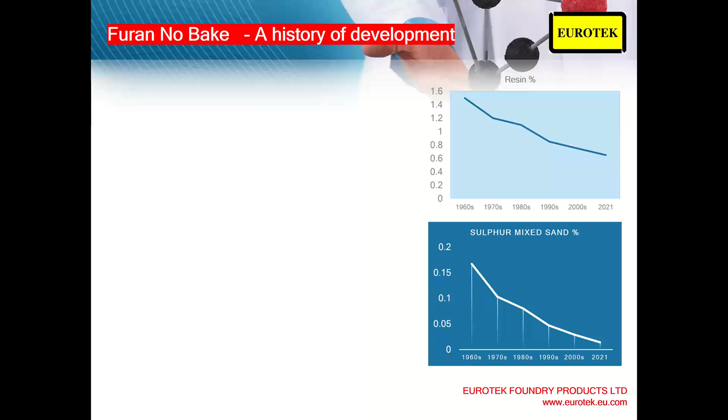Okay, and the presentation is on moulding materials, essentially furan no-bake, the continuing story. And I want to touch initially on the history of the development of furan no-bake. It was introduced in 1960 with the formation of urea formaldehyde and furfuryl alcohol resins. They offered a unique ability to generate high mechanical strength, which was a significant advantage over, at that time, inorganic systems such as sodium silicate.

And their organic nature meant they could be mechanically reclaimed for the first time. They also gave improved casting finish, particularly in terms of definition, over traditional green sand. And this led to their rapid worldwide acceptance and use. However, the addition rates in those days were typically 1.5% binder, and the catalysts in the region of 50–60%, based on things like sulfuric acid.

The 1970s and the 1980s saw the furan no-bake system become the largest selling group of foundry binders worldwide. And it also saw the introduction, for the first time, of phenol formaldehyde furfuryl alcohol binders and the corresponding copolymers, which meant they could basically be launched into steel foundries. At this point, addition rates were falling, and typically binder levels were in the region of 1.2%.

But during the 1970s, we saw the introduction of urethane no-bake, pioneered by Ashland Chemicals, often now referred to by their trademark, PEP-SET. It began to enter the market and was particularly excellent in terms of core-making abilities and also for non-ferrous applications. And also its sister gas-cured process, cold box.

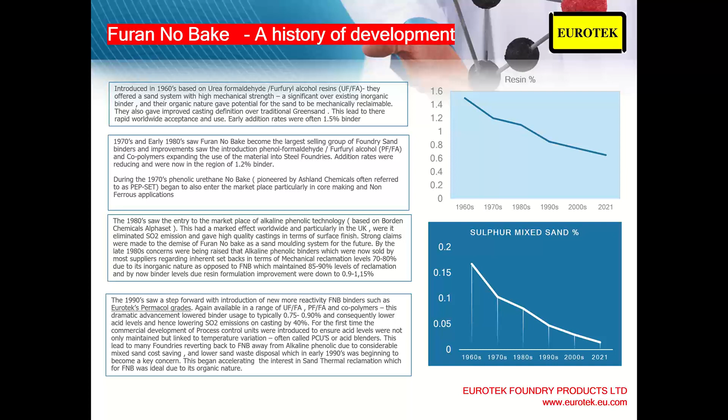The 2000s saw continued development, and again it was the reactivity of the binders that moved us forward, with the Envirocol range and other companies manufacturing much more reactive binders. This has meant furan can now run between 0.6 and 0.75 for very well maintained sand systems, offering low mixed sand cost, improved sand reclamation, and reducing SO2 by a further 30%. This shows the trend of the graphs opposite.

This has also led to further advancements in process control, strongly introducing more accurate blending and remote access support to ensure chemical usage is minimised, which will be seen later in the IBS system marketed by Foundry Machinery and Spares.

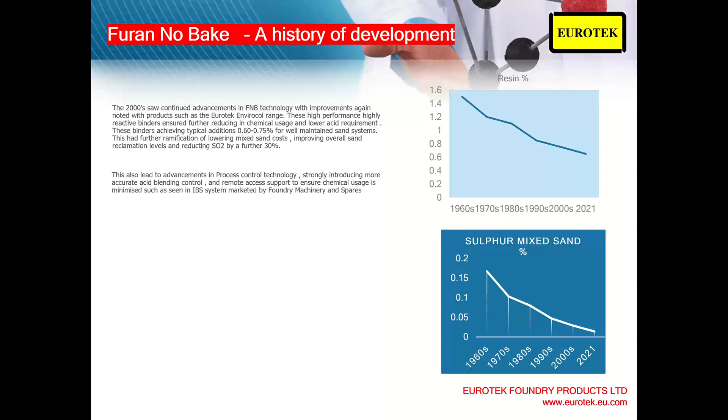An example I personally give: most Saturday mornings I get a phone call from one of our biggest furan users in India, where he makes very large boxed and boxless molds at around 50 degrees and requires fine tuning on his blending. We do this remote control very easily, rapidly, and successfully. He maintains addition rates of 0.7% binder on poor local quality sand and maintains the ability to produce large molds at over 50 degrees centigrade, something we would not have been able to do back in the 1970s, early 80s.

Recent developments have seen the introduction of even higher performance polymer versions of furan no-bake. Why have we brought those in? Two reasons: one is to reduce the demand and use of furfuryl alcohol in the binder, simply to drive costs down. I think there's probably nobody in the industry who doesn't know the impact at the moment of FA on furan binders worldwide, with COVID and the Chinese export situation, furan prices are probably at the highest price they've been for 25 years. So it's something we need to work on, and it's now been introduced into the market.

This has also been driven by new REACH environmental considerations, where free formaldehyde levels have to be less than 0.1% of the binder, and this we are now achieving on a readily acceptable basis. Going back to furans in the 90s and early 2000s, they wouldn't have achieved this - they'd have been more than 0.5% free phenol or free formaldehyde, and therefore would have been outlawed under the new regulations.

Furthermore, as I said, the ability to mix and control sand up to 50 degrees gives us a unique ability, and this is now being underpinned with the development of new lower sulfur catalysts, which for the first time are giving us the ability to achieve those goals while maintaining performance and strength. In the old days, the classic way was always to basically water the catalyst out, which is no good for big molds at high temperatures because of the through-cure characteristics.

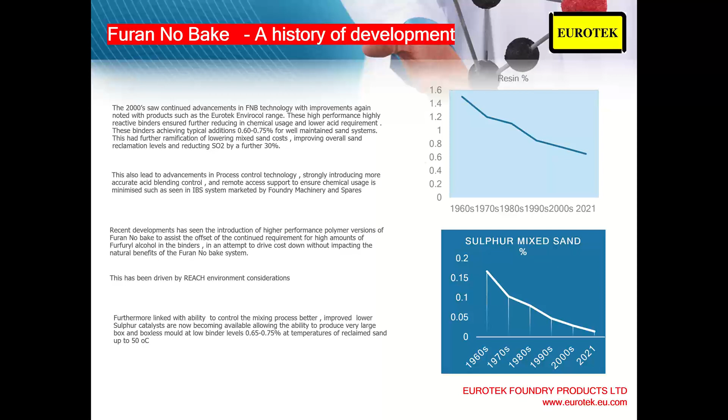So I'll just quickly discuss the three groups of chemicals: the traditional furan, which we call Permaset, the more reactive series, Permacol, and the new very reactive series, Envirocol. You can see here, for example, Permaset is a traditional furan binder, used for large box moulding - it gives good breakdown, but it's a traditional furan system.

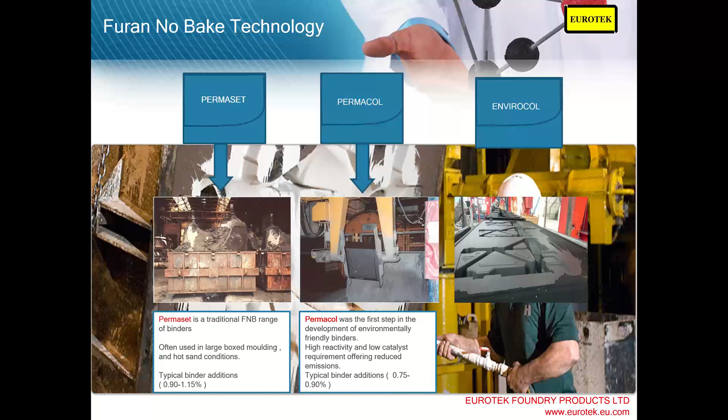Permacol was the first step in the development of environmentally friendly binders. It has high reactivity, low catalyst requirement, and low binder usage. Here's an example where you can see from a fast loop a mould being picked up after 6-7 minutes and moved to the coating station because of the high mechanical strength and rapid set. I think Alex Simmons will be quite happy, let me tell you, that's where it is.

Okay, and then we look at the Envirocol - they spearhead the latest environmentally friendly technology. It offers low emissions in terms of SO2, free formaldehyde, free phenol, and also biological and chemical oxygen demands.

A classic case at the moment of reclamation is, for example, an alkaline phenolic. If we analyse an alkaline phenolic, it has 3.5 to 5.5 milligrams per kilogram of elutable phenol; new furan is less than 0.02. The other concern in the industry at the moment is concentrated elutable carbon - alkaline phenolics are in the region of 400 to 500 milligrams per litre, while furan is calculated at less than 2. So these are dramatically more environmentally friendly products than we think, particularly its ability to go to waste.

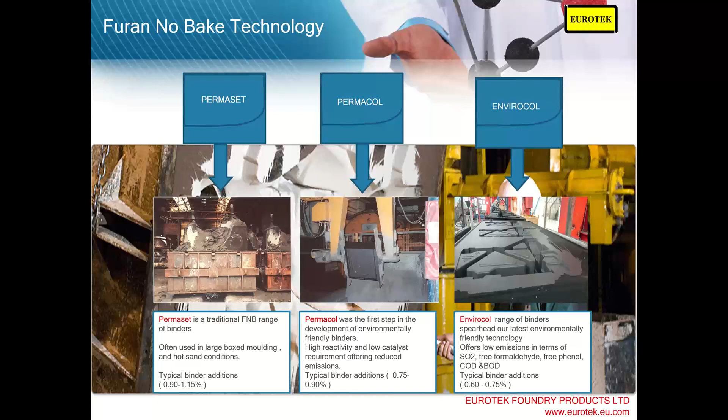So let's look at some of the benefits. We have high core and mold strengths. This means we can typically turn the binder down dramatically from where it was at its early concept.

We have excellent reclamation properties. We can reclaim 85 to 95% with mechanical alone. And the example I always say to foundries: if you do everything right with a furan mould, you'll get a good mould. If you make anything bad with a furan mould, you'll still probably get a good mould. Other processes such as alkaline phenolic, you won't get that. You have to do everything absolutely right to maintain the quality.

It's an abusable system. It's high reactivity. It gives you fast set times. It's ideal for boxless moulding, fast loop systems.

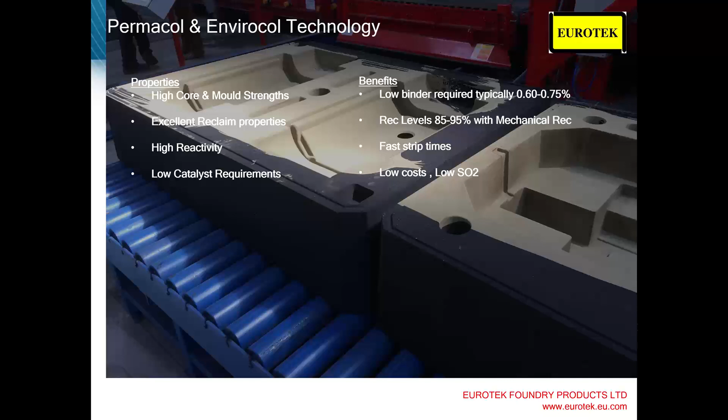It has now lower acid concentrations and requirements. This lowers cost. It lowers sulfur dioxide. It has low viscosity now compared to what it used to do, which means you get much better compaction and higher surface finish than you did with traditional furan binders 30 years ago.

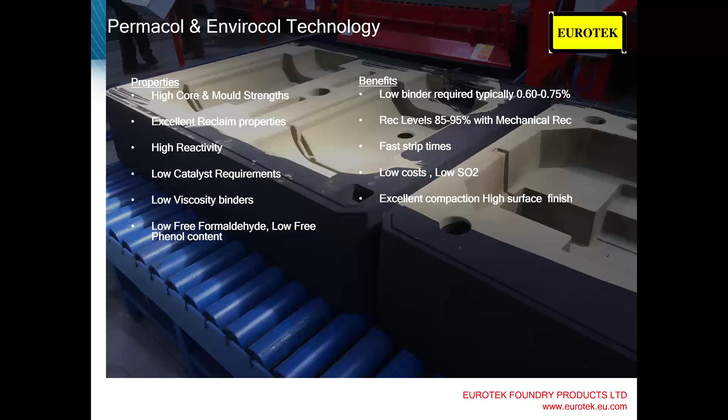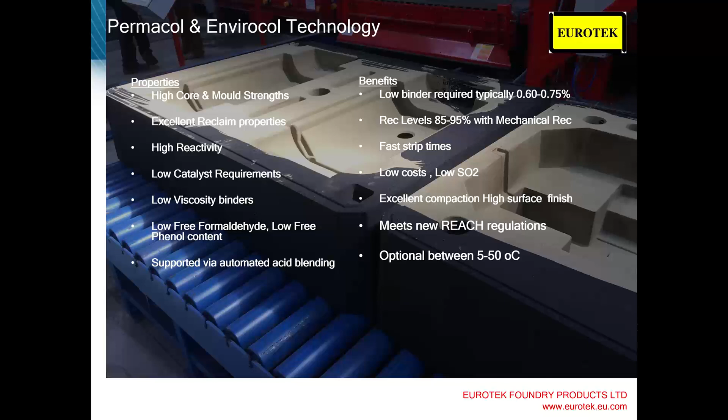We offer low free formaldehyde, as we discussed, low free phenol content. And that meets the new REACH regulations, fundamentally very important. We're supported by automated acid blending. And it's operational between 5 to 50 degrees centigrade, which is a major change we've seen over the last 30 years.

We have a technology now called AiroPure, which we'll go on to shortly. And that is a mist that we can spray during the casting to eliminate sulfur dioxide. It's not an odour, it's not a perfume, it's actually a reagent which is non-carcinogenic. We developed with Durham University a material that converts SO2 to SO4 and removes the problem.

Okay, there's a cost, of course there's a cost. You're spraying an ingredient during casting into the atmosphere, which therefore has to meet all environmental requirements. It's non-carcinogenic, it's non-hazardous, it's non-flammable. It's essentially a benign product.

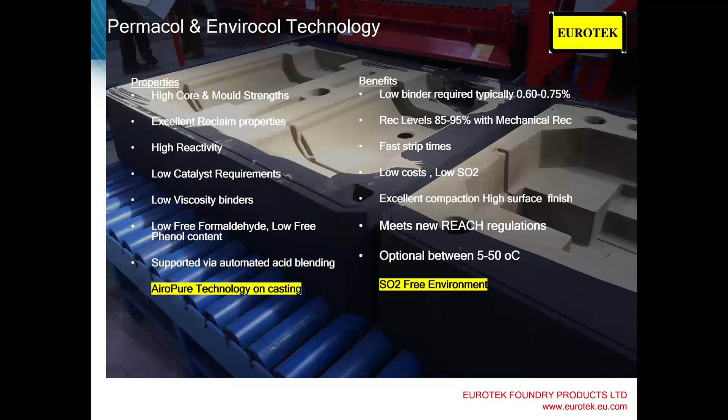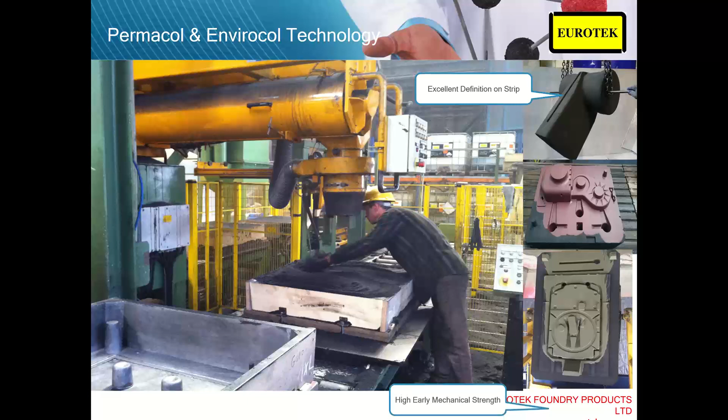So here we can see some typical examples of furan in action. We look at some of the excellent definition we get on these cores. We're looking at high mechanical strength. These are moulds being picked up off fast loop in about 6 minutes for coating.

We have low fume now at the mixing station, albeit on an omega machine where there is an extraction point on it, I'll admit. But the level of free formaldehyde, free phenol and free FA on this system is dramatically lower than what we used to see 20, 30 years ago.

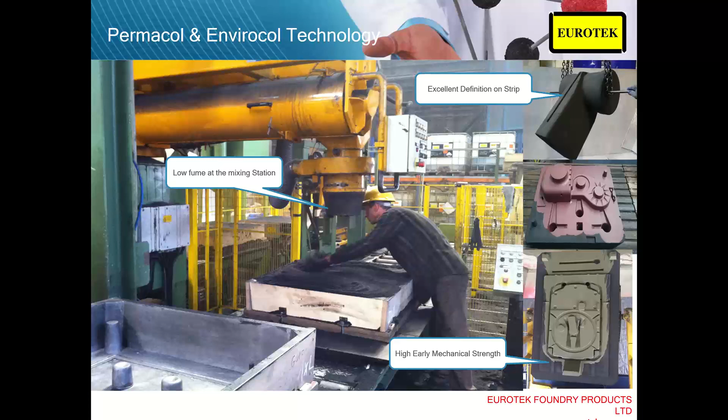We see high levels on this particular foundry of mechanical reclamation. They reclaim at 90 to 95%, although they do use a secondary attrition unit for the last 3 to 4% rather than the thermal. We see the improved mould definition because of the low viscosity.

We see the ability, because they're generating mechanical strength, to be able to apply coatings quickly after the moulding process starts. We don't see the same degree of softening back of coatings that we used to see traditionally 20 years ago.

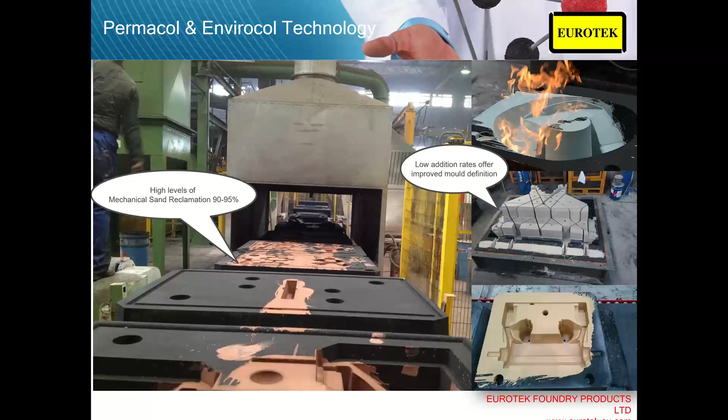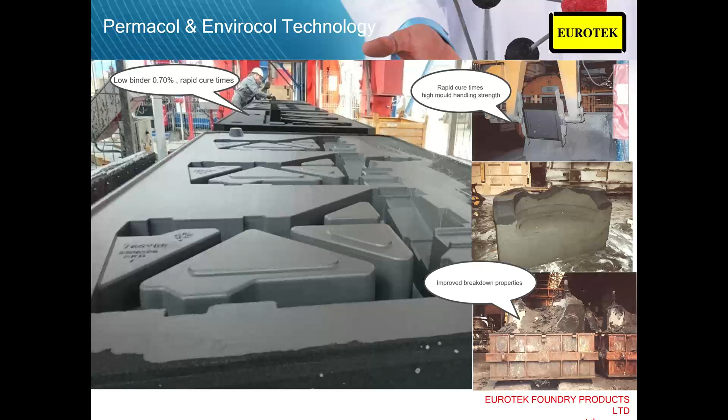So what we're trying to put together is a development package where we put the improved binders, which have low fume, with the control panels, the better control, the ability to remove sulfur dioxide, to meet REACH regulations, to have the ability to reduce costs because it's no longer having to be mass volumes like most processes going through the reclamation system.

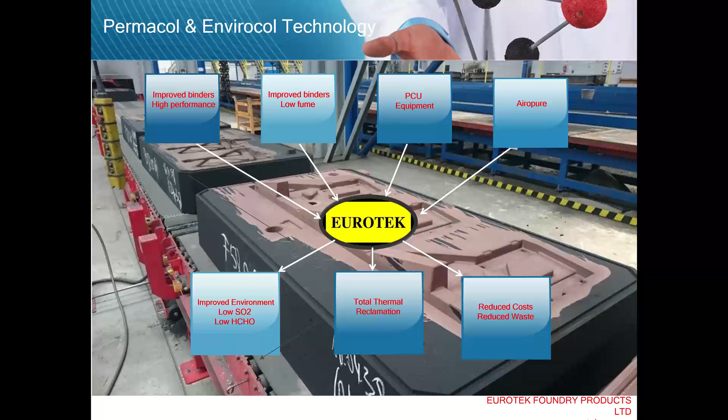We can actually just dump 5% or even then introduce, if necessary, thermal reclamation. It's organic, it doesn't need additives, it works very, very well, very successfully, and there are many foundries worldwide thermally reclaiming. So that gives you the ability to close that loop, but it still means you need a sensible control of your sand system, understanding of your sand system. It's not an excuse to just get away with poor practice. If you put good practice together with furan, you will make excellent moulds at very low mixing cost.

And here's an example why. It's just generating, but essentially, if you look at the mechanical strength of, for example, these dog bone tests taken in PSI at 1 hour, 2 hour, 4 hours, and 24 hours, standard furan will generate out about 155 PSI after 24 hours.

Improved furan system now will generate over 225, a significant jump. That jump is seen more in the 1 hour strength, where, let's be fair, most of us are handling our molds. So from 50 to 60 PSI, we're now hitting levels of over 100. And that strength can be traded by lowering the addition rate. We don't need it all, so we can then lower the addition rate, lower the cost, lower the chemicals going into the sand, improve the environment.

So until recently, with the problems that have arisen with furan and furfuryl alcohol supply, you were suddenly offering a product that environmentally was better than previous, and it was actually cheaper on mixed sand costs. So it wasn't a difficult concept to sell.

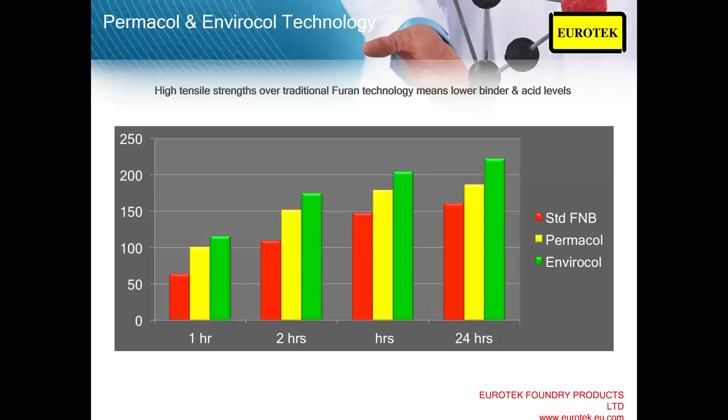When we talk about the AiroPure, it's a non-hazardous product which reacts with the sulfur dioxide, because let's be fair, it's the sulfur dioxide that's got the bad name. It's the elephant in the room as far as furan is concerned. It gives us the ability to remove and reduce it - in terms of metallurgical issues like sulfur reversion, and also SO2 issues in terms of the environment people work in.

Here's an example we did. The top right-hand corner shows a really poorly controlled furan foundry, who after 6 minutes of casting were hitting short-term exposures of 12 parts per million, which is ridiculously high, probably 6 times the legal limit. The introduction of the AiroPure at that point rapidly put that back under control and let it run at around 1 part per million within 20 minutes, which is a significant change for them. That said, if you look at the process first, get the better resins, the better acids, you won't be achieving the 12 parts per million.

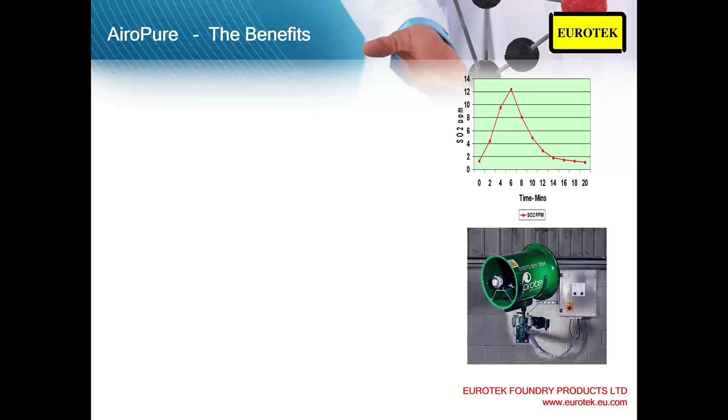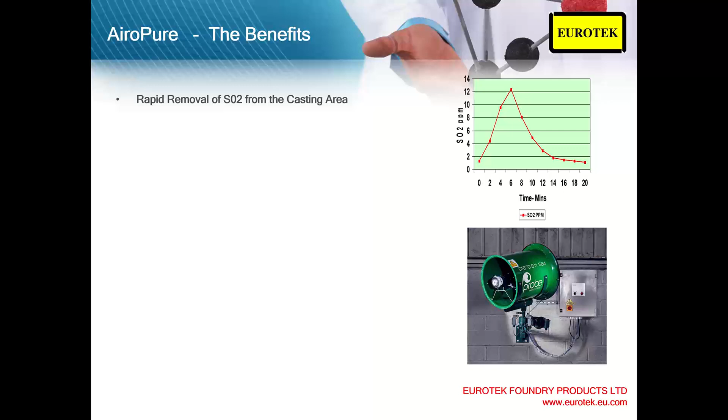So the AiroPure is there to complete the loop, not to offset poor practice, which many people think it is. It removes the SO2 from the casting area, converting it to SO4. It's not like in the past, where there used to be chemical reagents that smell like perfume - not very lovely, but still having all the SO2 inside them. These are actually removing SO2.

It is non-hazardous, the reagent. It's benign - I'm told you can actually officially eat it, but I wouldn't recommend it. It's robust. The plant is very simple. You can see it's an automated spraying system. It's low maintenance, low cost, simple to install. It can be put in many places in the foundry, can be put on timers. You're not talking massive cost - low operating costs.

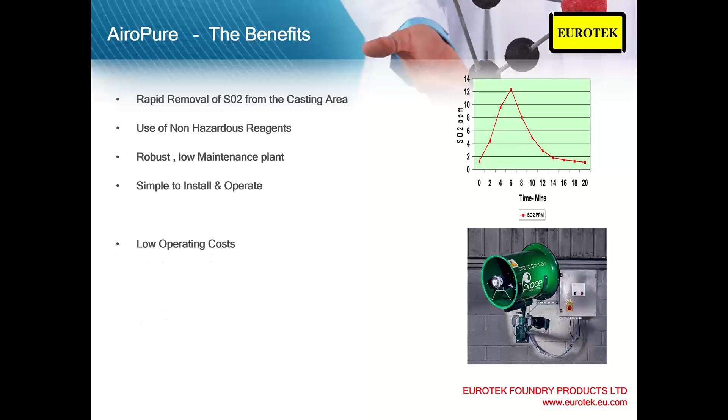And also, as a side issue, the AiroPure, there's a version that actually works with TEA, which gets rid of the TEA aspect for a cold box. You can link it to SO2 monitors, which we've done successfully overseas, so people can monitor the SO2 in the foundry and have a log to show the health and safety executives when they turn up and request information.

It's put in as a fine mist, usually put on 5 minutes after casting, and then it runs for about 10-15 minutes, and then it's switched off. It's a unique droplet formation technology that picks up a surface area and absorbs rapidly the SO2.

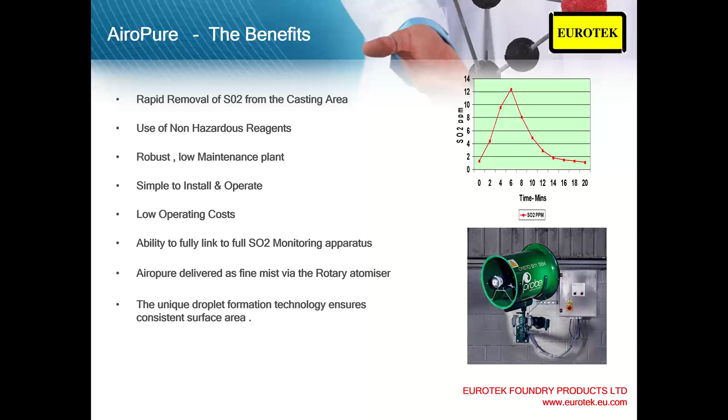Okay, let's just then talk about process controls. These were launched in the 80s and 90s, and Neil will come on and talk more about them, but they give consistent production. They reduce mold scrap, reduce sand wastage - and that can also be said for the other processes they can work with. They reduce binder, but importantly, for furan, they reduce catalyst levels, which means we can now use the lowest sulfur containing catalysts. You can link them to flow control, data logging, so you can work out how much material you've used, and also now remote control.

And the new level, which we brought in, is significantly better still. This has been pioneered very much by people such as FMS. Maybe Neil can go on there to explain now.

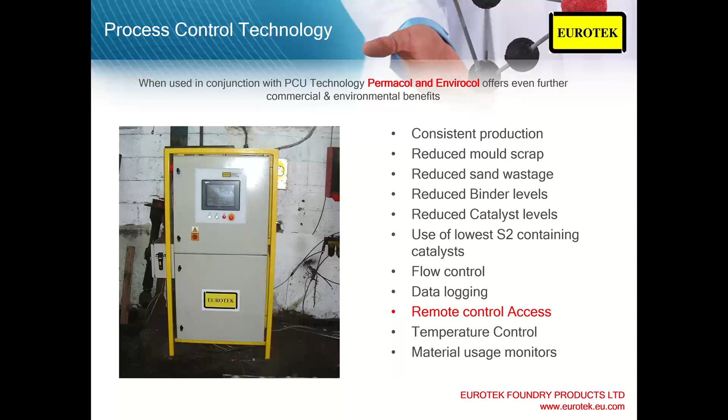Yeah, basically the two ways, you know, the original way of blending was manual. You had your set cure times and recipes within a control panel, and it was very manual. The operator had to select it. If the sand temperature gets higher, you needed more chemicals. If it got lower, you needed to adjust it further, and the calibration was key from an operator.

Whereas when we developed this system with Eurotek, we looked at the differences of what was required and when it was required through the day. You know, these systems don't just go in the UK; they go all around the world, as Ray said, in India, for instance, where you could be getting up to 50 degrees, but at times it could be a bit lower than that. So the system uses a PLC control, typically a Mitsubishi or a Siemens based system.

So it's an industry standard, if you like, and is constantly calculating what's required through the PLC control and the settings that are in there at commissioning, to ensure that the set times and the strip times that are required are constant through there. And that helps your production, it helps the quality, it just makes the life so simple for the operator. All he's really got to do is fill the box and away you go. It can be overridden, of course, if you want to change and extend the strip time or decrease the strip time by temperature offsets, and we can set those within the program as well.

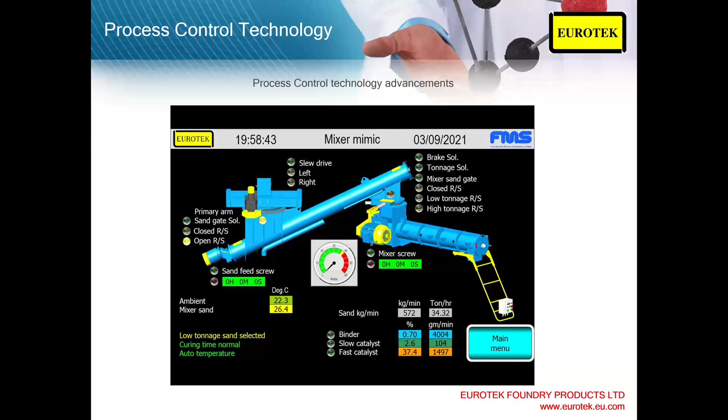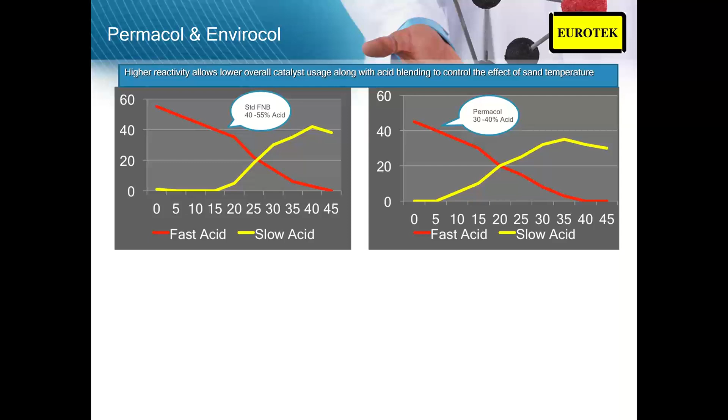So then we looked at how can we improve it. When Permacol came out, we saw a change. The graph started to change dramatically. The highest point here started to drop. Okay, so we look at that and we say, okay, we can now run at 30 to 40%. We can bend that graph differently. We can get more performance to achieve what we want. And again, as we develop the chemical process of the resins and the acids, we've underpinned it with the support of the equipment manufacturers to give us the ability to control that.

And again, we see here now with the latest systems, we probably typically run around about 35% compared to 60% in the early days. And we're pulling that graph different again. We're dropping fast acid out now at 30 degrees. And the slow acid has the ability to generate a through cure at even large molds at very high temperatures. And again, that's linked to the performance of the chemicals, and again, underpinned with an ability within the equipment, the way that has developed, supported.

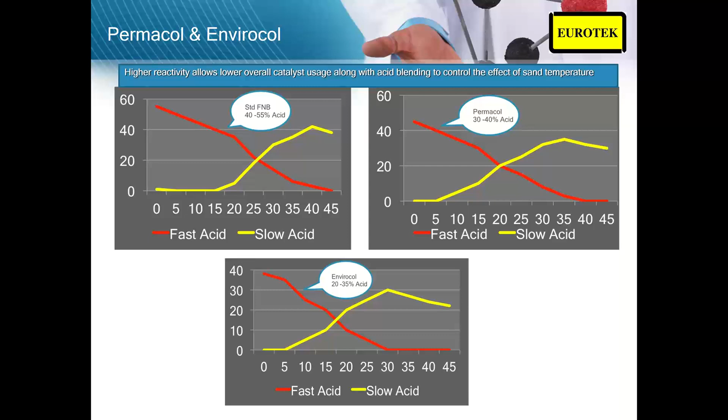Neil? Yeah. Are we swapping the sharing? Yeah. Yep, I've just made you the presenter, Neil, so share your screen and you should be good to go. Okay. Are we seeing that, everyone? Yeah. Right. So moving on from Ray's brilliant points on reducing the chemical usage through the technical advances. Not at the moment, Neil. Let me try again. You want me just to click through from my presentation, Neil? You tell me when. You can do. It is saying I'm sharing, but... Yeah, we can see your screen now, Neil. Right, brilliant. Obviously took a little bit of time to come through.

So as I was saying, moving from Ray's points on the technical advances that he's made with the chemical systems themselves, over the years, thermal reclamation has been used with the furan system quite extensively, and I've been involved in many projects for it, and it's been brilliant. The main advantages of doing this is that it gives a more stable product in the long run, and it also eliminates the need to dump the sand and be reliant on a good new sand addition coming in from the quarries.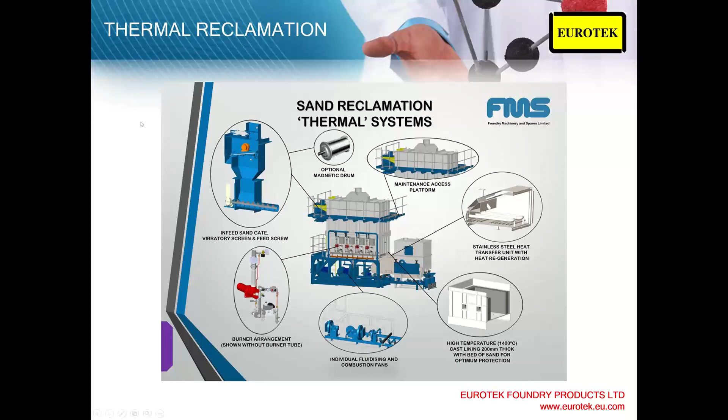Okay. Yep. And I'll pass you back for the final slide, Ray. Yep. If you can make me the presenter again, please. I'll stop sharing. Yep, you're the presenter again, right? Yeah, I was picking it up, mate. Okay, we've got through nine slides, you're just saying.

So just as a summary, some foundries will always regard other no-bake systems as the panacea for them, such as urethane and alkaline phenolic. Okay, that's the way it is. Because certainly with steel foundries, there's a big requirement to get very high quality surface finish. There's always a battle for many foundries of the mixed sand cost against the casting cost. And what is that casting cost? It's the savings to be made in surface finish and fettling costs. So there's always a balance.

In real terms though, neither of the two broad processes have really changed in 30 years. There'll be claims by ourselves and other suppliers that our products are slightly different and everybody else's is different. But the reality is, yes, urethanes have reduced the odours compared to what they were from the concept. But the basic chemistry has not changed in 30 years.

It relies heavily on thermal sand reclamation, particularly for non-ferrous. This penalises, in many cases, small to medium-sized foundries. It's very good, for example, in some of the core making applications, where many of us have seen we reduce hot tears by the introduction of urethane technology. So all these things have their niche, but the basic chemistry in 30 years has not overall changed.